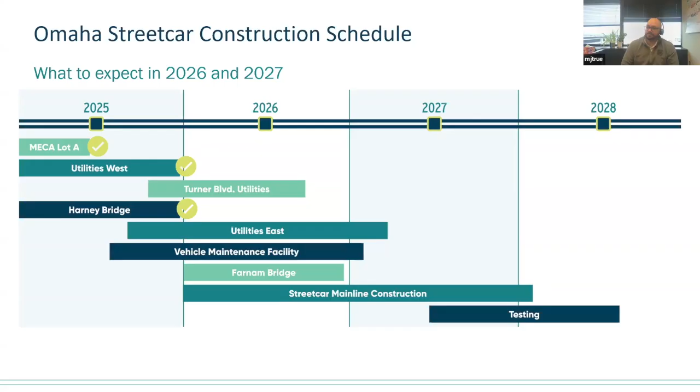And with that, I'll turn it over to Megan to cover MUD's remaining work for gas relocation. Megan? Hi, everyone. Thank you.

So this first slide, this is our final phase 5 slide, which includes alley work south of Farnam Street between 19th and 20th Streets, which we expect to be completed by the end of this week. Our crews will also install a short section of gas main at the northeast corner of 20th and Farnam intersection. This work will begin once other utilities have completed their work in that same area.

In addition, we will complete several nearby gas service reconnections and, where necessary, service replacements. After these items are finished, we will make the final connection to the existing gas mains to ensure continued system reliability. Barring any unforeseen delays, such as weather, we anticipate completing all gas main installation work by the end of this month, so crews may return periodically to perform minor adjustments as needed.

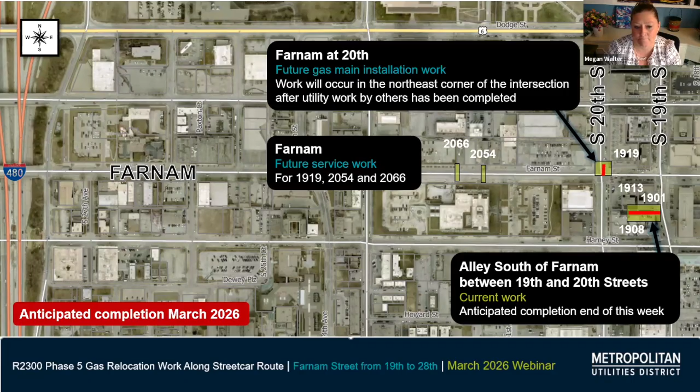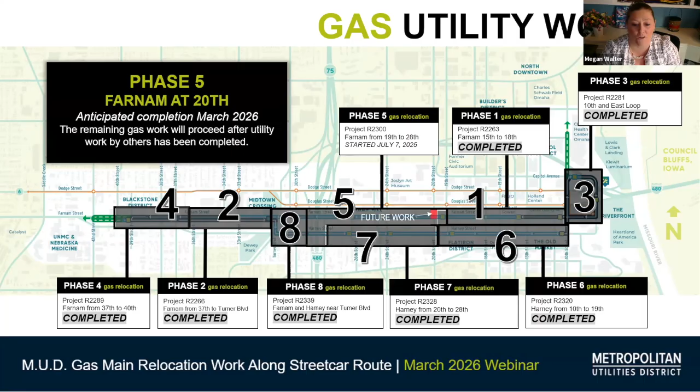So with our final slide and phase 5 nearing completion, MUD is now close to finishing the full scope of gas main relocation work associated with the streetcar project. The majority of gas infrastructure work along the entire streetcar route has been successfully completed, with only this final segment remaining. We appreciate everyone's patience and cooperation as we've worked to relocate the gas mains along the corridor. And with that, I will turn it back over to you, Mike.

Thank you, Megan. Kind of exciting to see that. Another one we can check off the list as we continue downtown.

With that, our first streetcar specific project we will be covering is the I-480 bridges. Steve, are you ready to take that on?

Think we may have lost you, Steve.

Just to pick up where he was talking about on 28th Street, there's some additional water main work that we're trying to deal with at the intersection of Farnam and 28th. And as you can see, there's a detour out here.

I guess just to reiterate where I was at, the bridge is going well. Most of the impactful work's happening on 28th Street between Harney and Douglas. They're doing storm sewer work, water main work, and there's some future water main tie-ins. Otherwise, this project is progressing nicely.

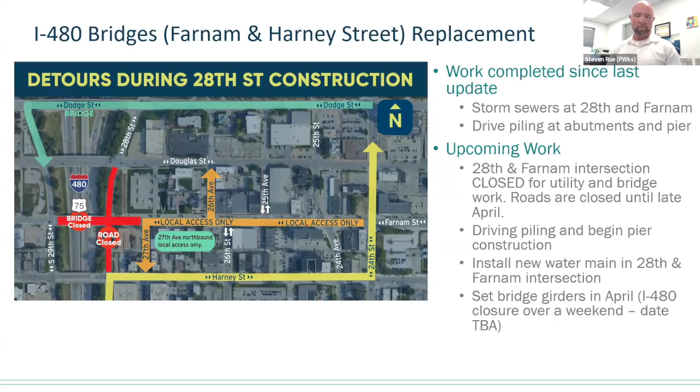I guess if it cuts out again, somebody just let me know.

So on to the utilities package. This is our largest footprint package that we have going on. Basically, at this point, we've completed that utility work in the Capitol Loop, and if you go over there right now, you'll see Kiewit starting their track construction right behind it. So that's great, we got out of that congested area.

We have crews working Harney and Farnam. They started on 10th and they're basically moving west. So coming west right now, we're right around that 14th, 15th area. Farnam 14th to 15th will be fully closed in mid-March. Right now we're anticipating the second week of March, but that'll be updated. You'll see message boards go up out there as that comes up.

Harney 19th to 16th also is going to be closing about mid-March. This is to perform that water main work that needs to be done in there and then restore service to everybody prior to the track construction that's going to come through. So there will be some significant traffic impacts in this area. There is tons of signage directing you where to go, where your detours are down there, but as Mike said at the top of this, just be very mindful as you're coming through that area.

And as we get into May, we're going to get out west of this area, west of the courthouse building. Obviously this project goes through the end of the year, but we'll kind of get out of this congested area that we've been in for a little while.

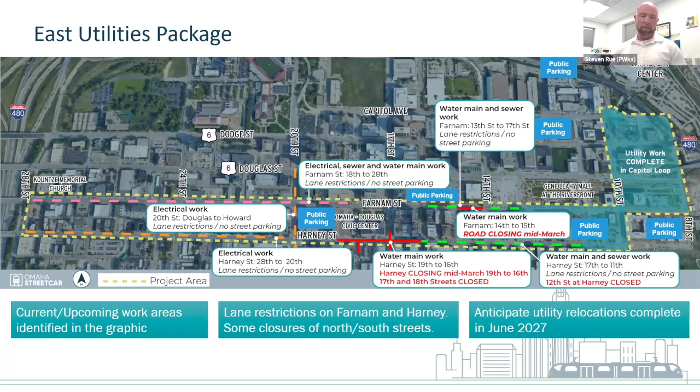So be aware of just some traffic changes in there. If you drive that way regularly, you'll see that there are lane swaps pretty regularly, and that just has to do with the nature of that work through there. But that's moving out west there, and you can kind of see that blue area of completed work starting to creep farther and farther west. We should just see that continue through the end of the year.

And then we have the Turner package. Again, smallest footprint package, most technical work. If you are in the area and it is somehow safe for you to do so, there is a massive hole out there, like a 33-foot deep hole for the sanitary lining that needs to go on, sanitary rehabilitation and lining that's going on out there. Pretty technical in nature.

Kind of an interesting opportunity for the fire department - they were out there last Friday utilizing this deep structure to do some rescue training. Obviously we don't have a lot of opportunities to utilize an extremely deep hole that's been engineered to perform some safe rescue training. So that happened last weekend, and I believe that's going to happen again this Sunday - I know they're working that out. So if you are in the area and you see fire trucks and everything, it is unlikely to be a fire response.

It is most likely related to this training that we're just coordinating with OFD. Pretty unique training opportunity right there.

As far as the project goes, we're continuing that very deep rehabilitation of the manhole happening in the middle of the Farnam and Turner intersection. Sewer lining is going on down there, and there's water main work around that, both north and south coming through that intersection.

We anticipate the major traffic concerns related to this deep construction to end at the end of April, so we're still on pace for that. The project itself continues through the end of the year, into late fall.

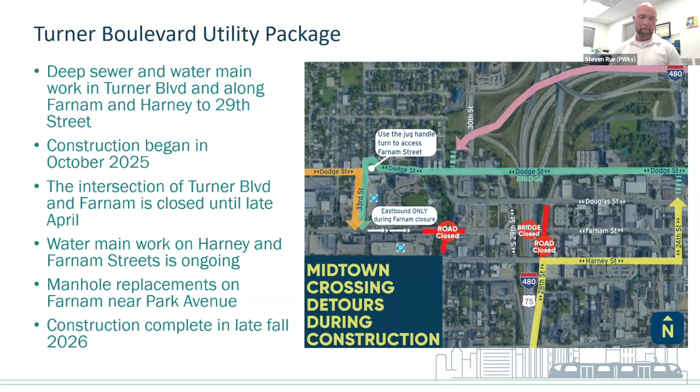And then I'm going to pass it back to Mike, and he's going to walk through the mainline track. Thank you, Steve. This is an overview of mainline track.

Areas we're at right now: orange is January 26th to 27th, Blackstone, Midtown, North Side, and the purple block for the Capitol Loop area. We'll be coming up with additional work along Farnham and Harney in April, and then again starting May of this year.

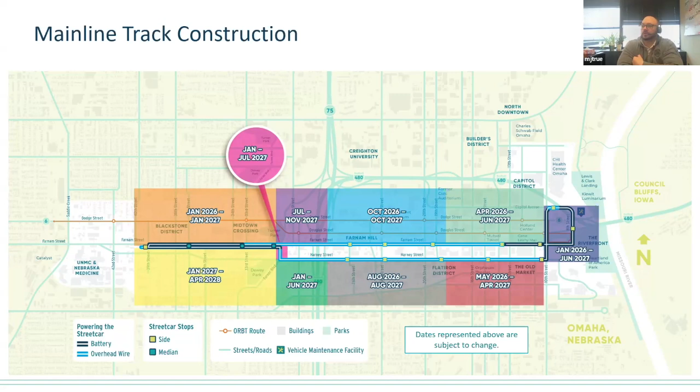So mainline track out west. We are right now, as you can see here, Farnam dead ends at Turner. We've got a couple more months like this.

So again, if you come down, it's real - we're going to strongly encourage you to use the parking on 33rd, especially if you want to take a left turn with a light out of there. But you can always come in. We do have some limited parking on the south side and an eastbound movement up to Turner Park.

You can also park in the garage down there. Parking is closed, but pedestrian access should be open. If for some reason you see anything out there, please feel free to call that in to us. This is going to be the setup until about end of April, so this will be on the next webinar as well.

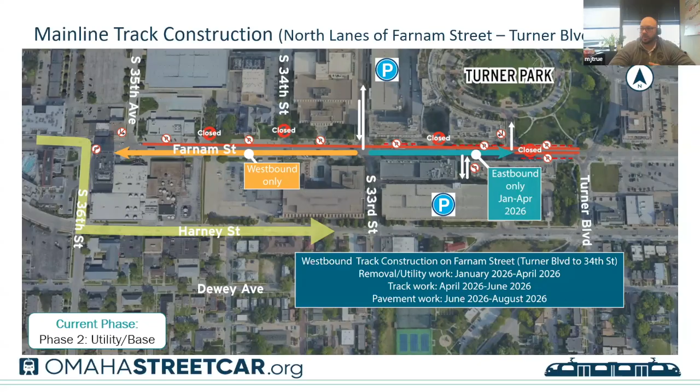Moving further west along, they have demoed out to about 37th Street. They're continuing to do potholing and try to make sure all utilities are located - they have a pretty heavy requirement on that internally to their company - and there'll be continued demo all the way to 39th within the next few months.

We are recommending that there will be some closures of the cross streets north and south. I don't believe that's in this slideshow, but we will keep you up to date as to what will be open and when.

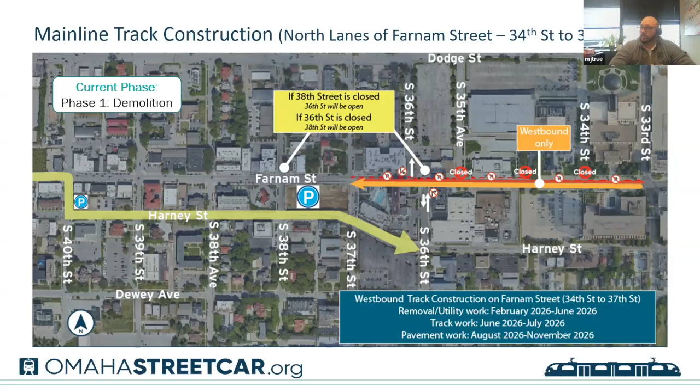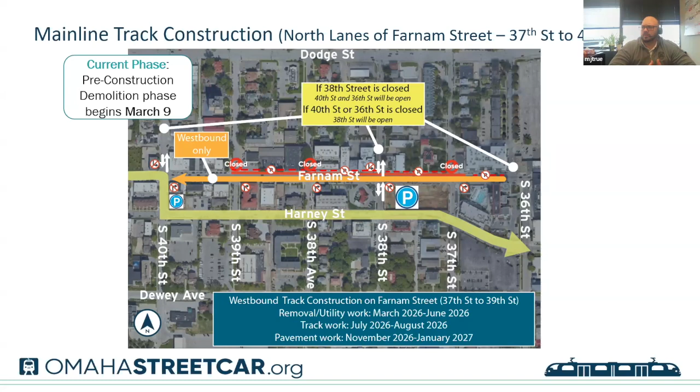This is what's going to be basically coming up right now, this last leg of it. This is going to begin - pre-construction demolition phase begins March 9th. Usually within a week or two of that we have the actual demolition of pavement begin.

Capitol Avenue, this is at the east end of the project now. We're showing the alternate at the bottom of your screen: Douglas, come in, local traffic, turn up 8th, come through, and you can access that block between 9th and 10th.

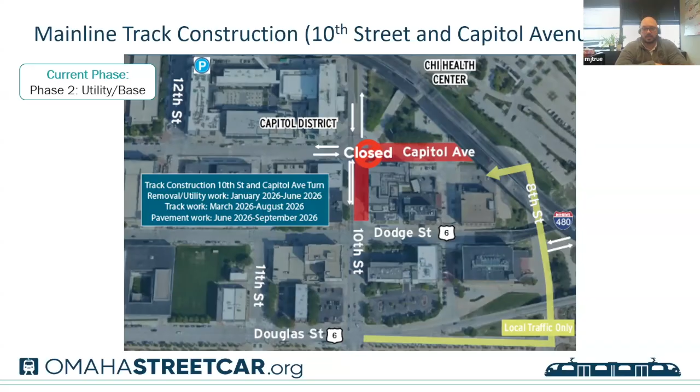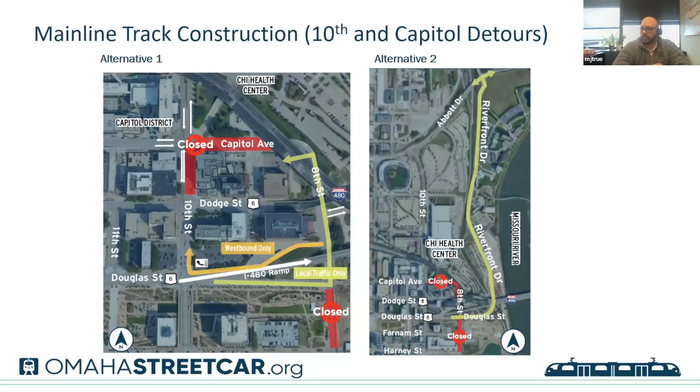Additionally, you can also exit out through Riverfront Drive, particularly for events - that's quite helpful. We also have a portion of 8th Street closed from Douglas on down to Farnam. You can come in Farnam one way, turn in, and the parking garage is accessible. You can also come in off Harney, but when you exit, you'll have to exit out through Harney.

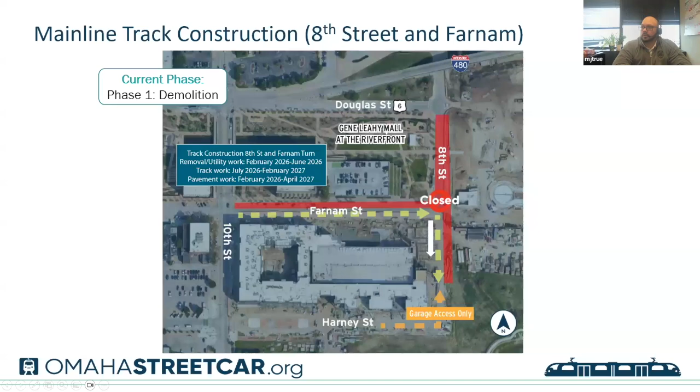Tomorrow we should start getting our first shipments of rail actually coming into town. They're going to start near the intersection of 10th and Farnam, just laying them down in approximately 80-foot long sticks on about a 100-foot long truck.

They'll sit there for a week or two until the welding operation actually gets into town. They will then pull them through - that's the 2-week closure noted in red. They will actually pull them through, weld them up into approximately 320-foot lengths, and then stockpile them in the parking area along the south side of Farnam.

We're also showing some potential storage along 10th Street, and a similar process - rail comes in short and then gets welded up and goes long.

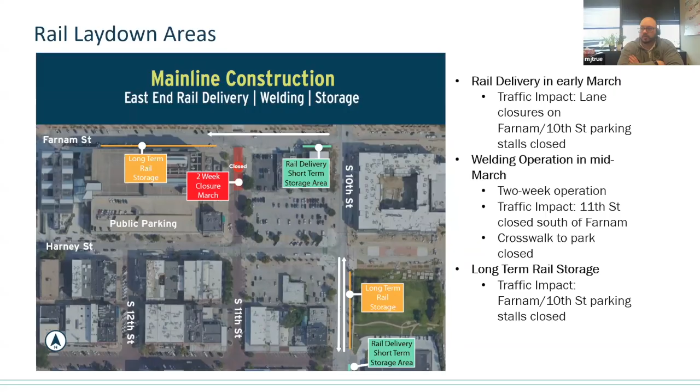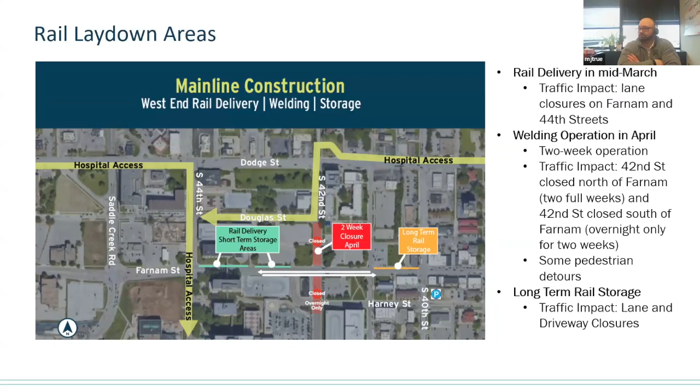So here comes the stockpiling along Farnam. It's coming up, and that'll also be the next phase in April. And then in May, we will have Harney Street pulling in as well, 10th going west.

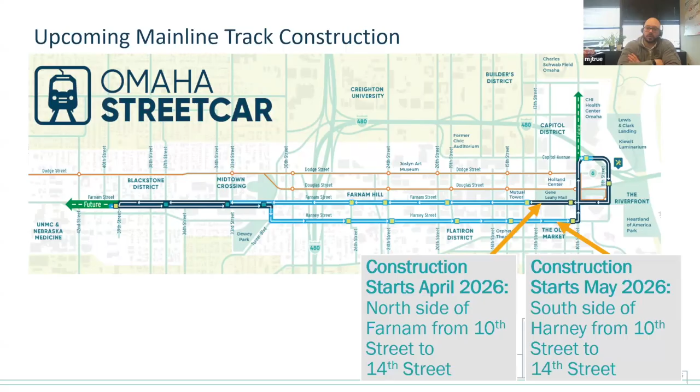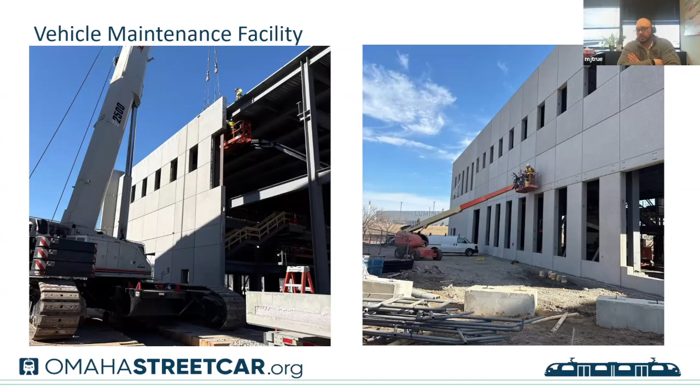And this will be the future home for both OSA, and this will be where, for now, the streetcars get stored at night and where any maintenance occurs.

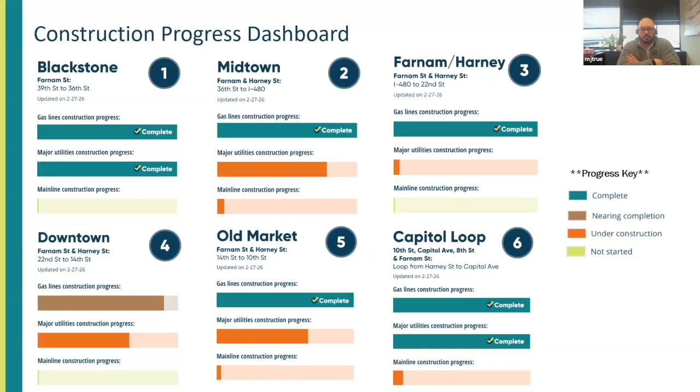And with that, I'll turn it over to Alyssa and her team for Streetcar Communications.